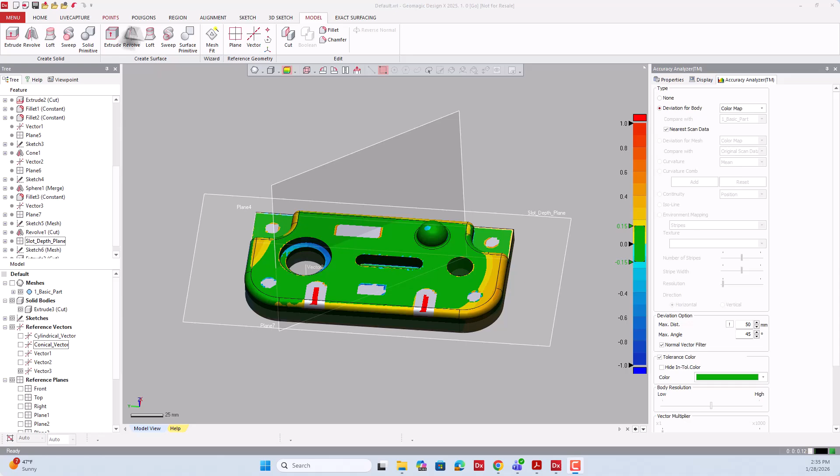So now continuing on in this lecture, we can see that we have made quite a lot of progress in this particular model.

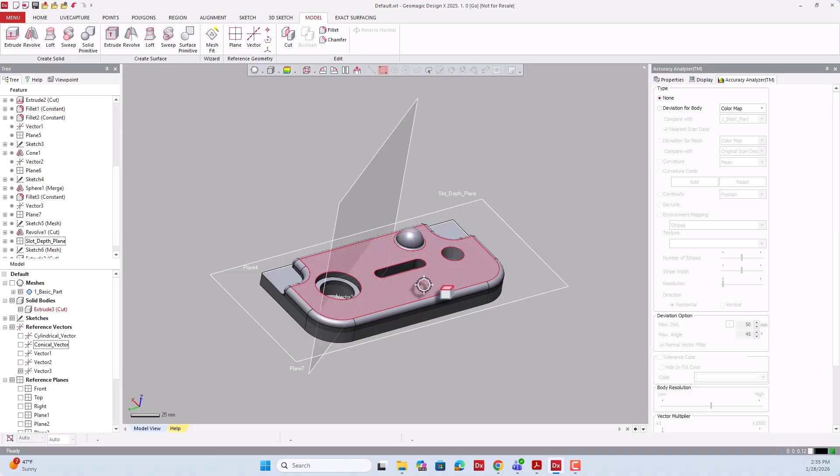As a shortcut, you can also hide the mesh here. If you want to make a mesh sketch on a particular face, hover your mouse over the face or plane and right click. You'll get the mesh sketch option directly, so you can click on that and it will point you to the mesh sketch button.

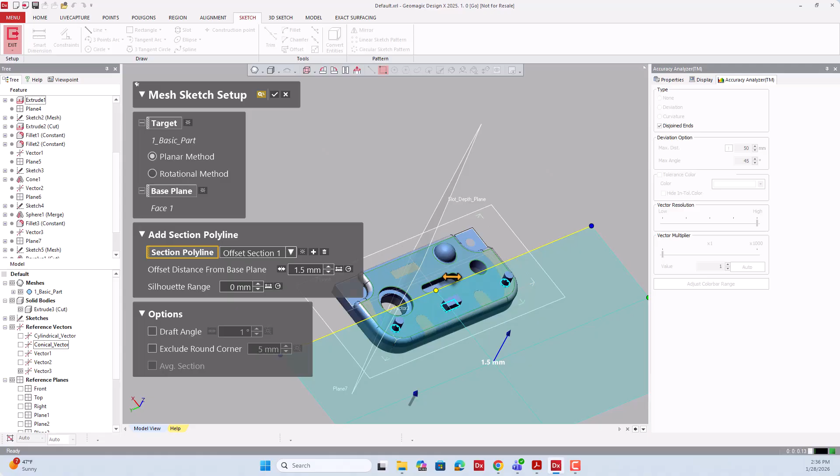Now you can also do the offset here. So I have done the offset. I don't need this side, so I can keep it, or I can drag it in here like that, and I can say okay.

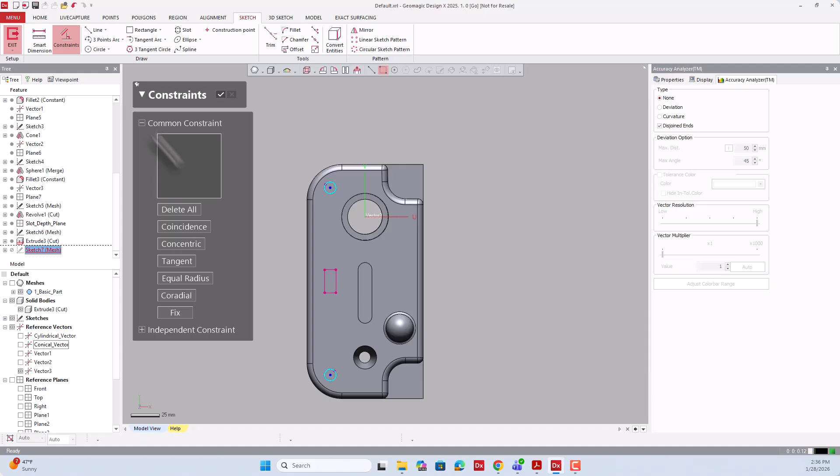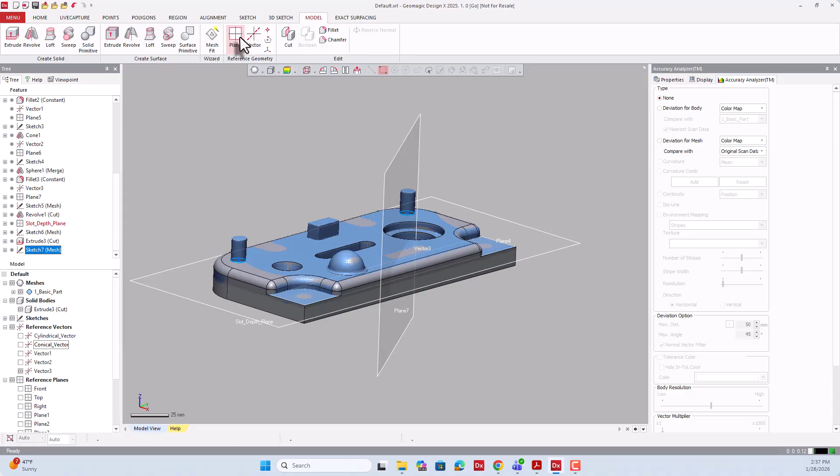So here I have these two circular cylindrical looking holes, so I can make my circles here, and I can add my constraints. I can select these circles and say make them equal radius, and add a dimension. The dimension from the scan came out as 9.87, so I can change it to 10 millimeters, hence adding my condition. And here, like we saw in the previous case, I can do an offset plane.

So I can choose the plane method, and go and say pick plane and normal axis. I can pick this plane, and pick this normal axis to offset the plane in a parallel fashion.

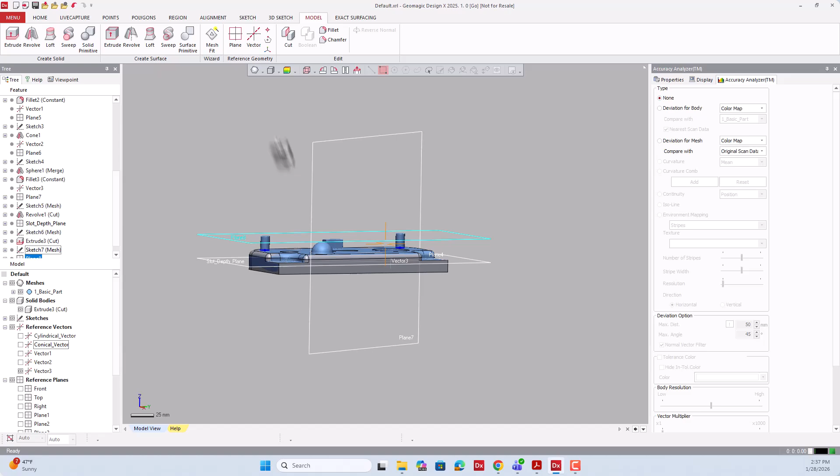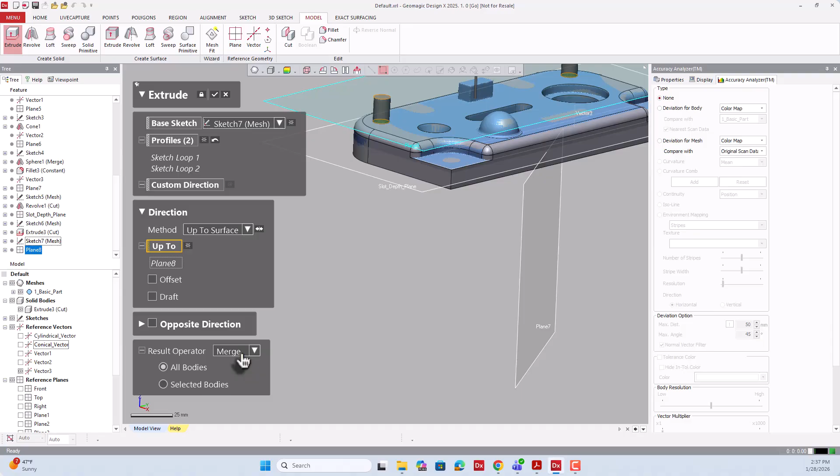Once it's done, we can go here to the extrude option in the model tab. So I'm in the model tab, and we go to extrude and select our base sketch. I'm going to select the sketch, and say extrude up to surface and select this particular body. And since we want it to be merged, we select merge as the option and say OK.

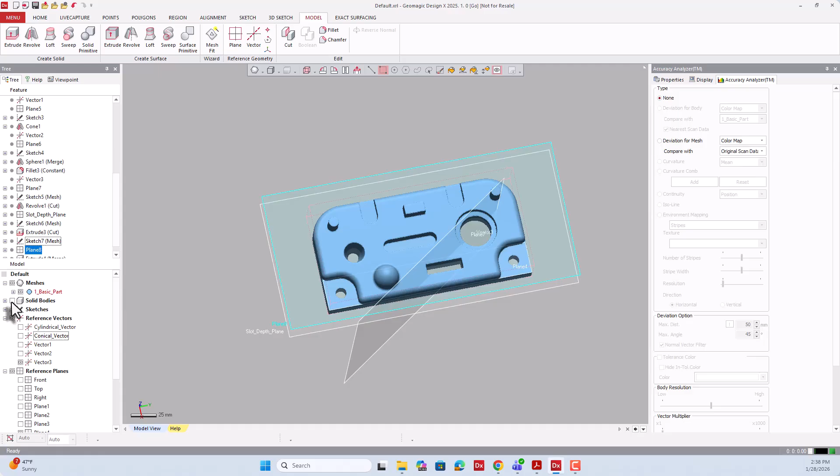So here we have built most of the parts of this particular body. We have a few other remaining parts. For example, for this area, I can hide my solid, and I can see that there are two through holes. So I can show my solid, select this face, right click on that face and do a mesh sketch there itself. I can bring it down and see both these holes. And here we can create our best fit circles.

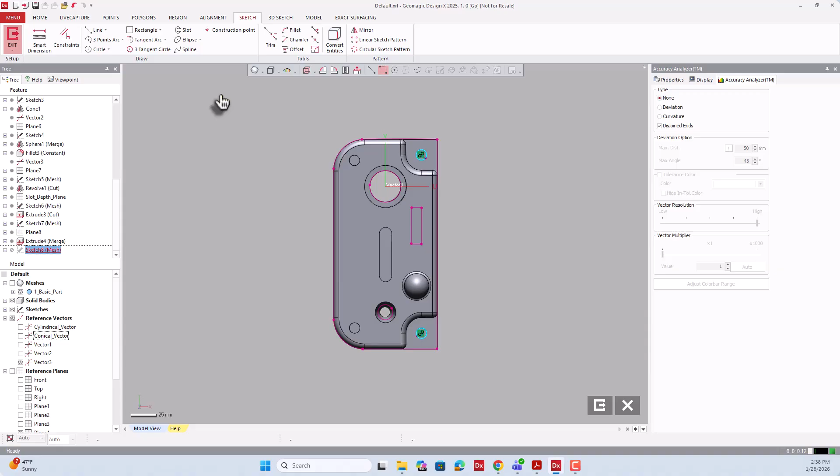Now I can make them equal radius, and I can also fit rectangles. So I can go to rectangle and make a drag box around this rectangle and say OK.

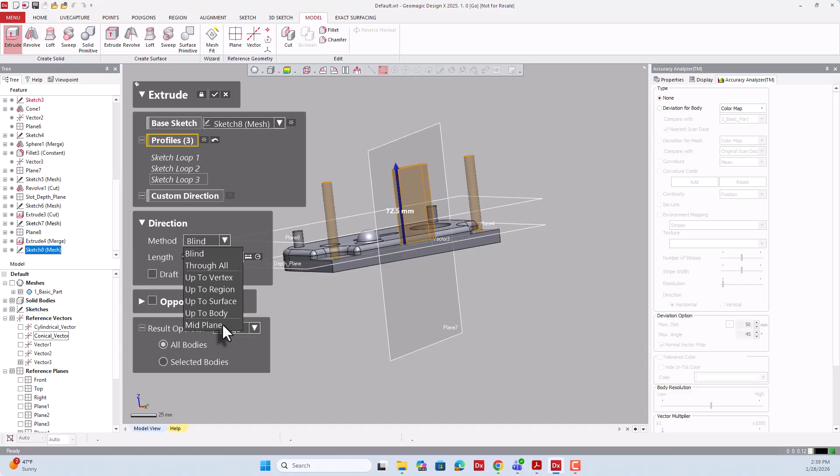Now, since it's all through holes, I can come out. I can go to the model tab, I'm out of the sketch. I can say extrude, and in the method we also have an option called midplane. So you can select midplane, and extend this through so that it extrudes uniformly on both sides, and you can add a cut tool.

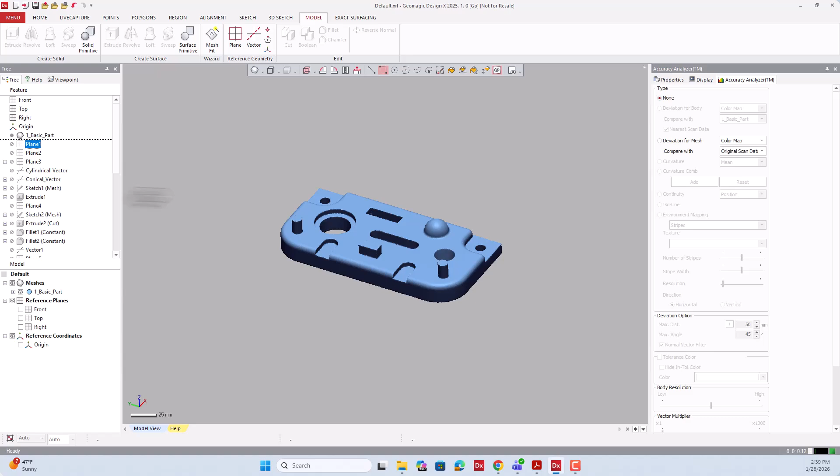So now here we have made this particular body, and we have reverse engineered the CAD file from the basic scan. At the top, you can also use rollback functions. We started with this particular scan, and at the end we have gotten this particular CAD file. I can also hide my sketches, reference vectors, planes, etc.

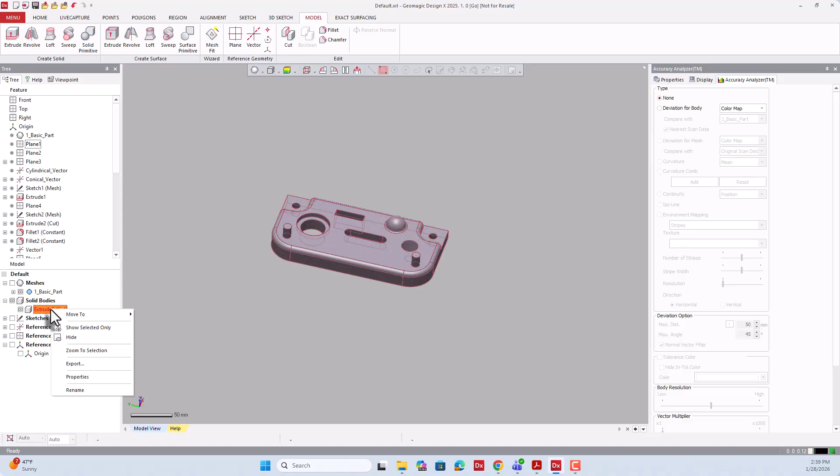Now, if I want to export this particular solid as a step file, I can come here to solid bodies, right click on my solid body and say export. Now I can export it to my desktop as a step or an IGS file. I can say export it as model_1, and I can export it or open it in any software.

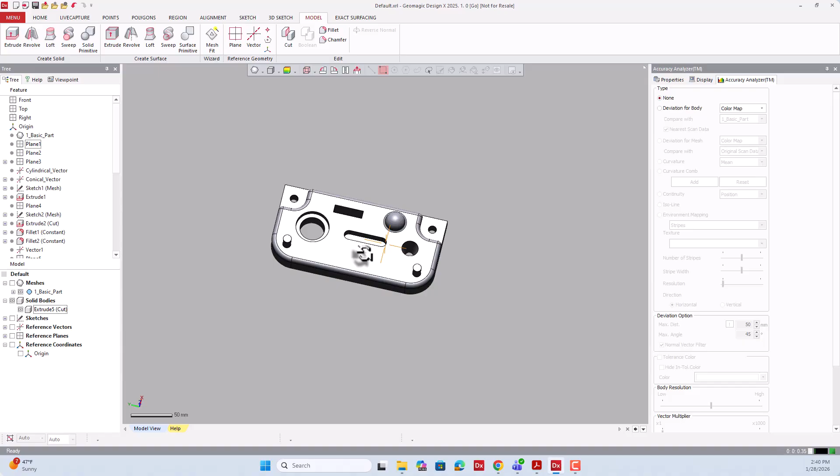Now, if you want to export this as a SolidWorks, Creo, or Inventor file, we can go in the Home tab, and there we have an option called live transfer. So I can click on the live transfer option here and go to SolidWorks.

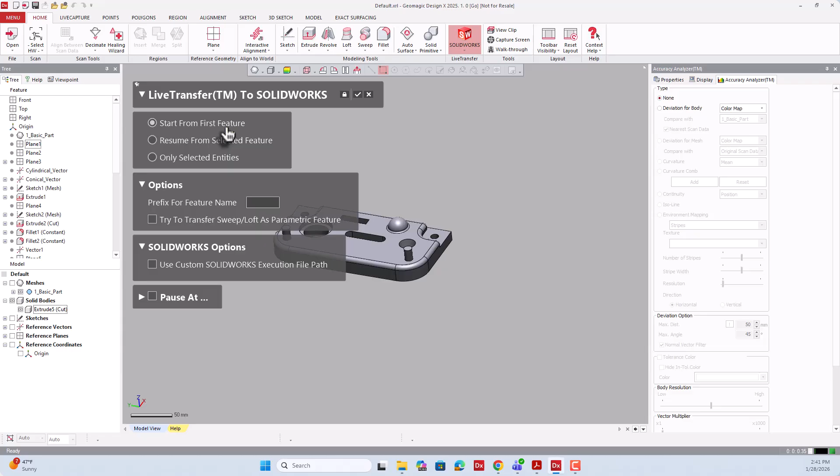I have SolidWorks installed in my PC, but we interface with SolidWorks, Creo, Inventor, NX, and AutoCAD. This is a very important procedure because instead of exporting a step file, we keep all this modeling history. So if I go to SolidWorks and say transfer to SolidWorks, I can either start from the first feature and export everything, or export some selected entities like sketches, extrudes, etc. So you can click here and start from first feature, and say OK.

Now this is actually going to load SolidWorks in your PC, and it will start rebuilding this particular model for you. So I am having it rebuilt in this particular system.

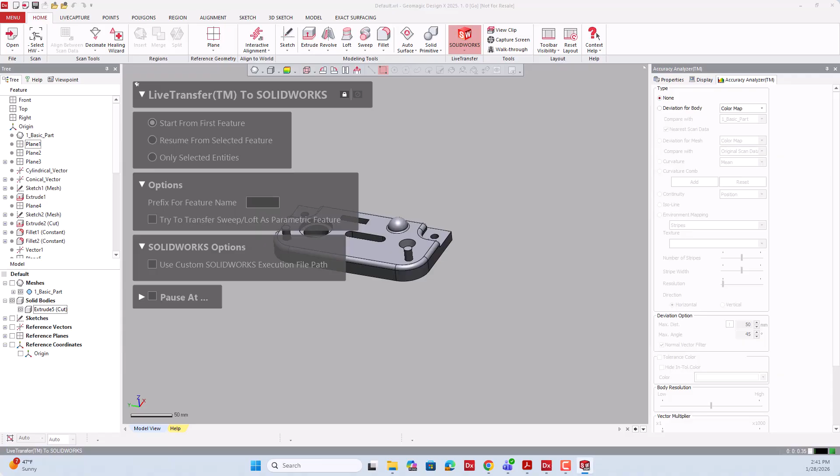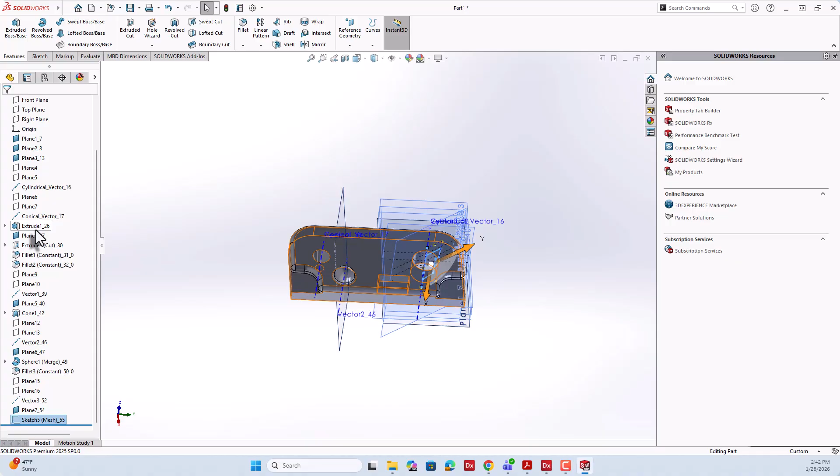And here you can see that the body is being transferred from Design X into SolidWorks, and we have all the modeling history, and extrude came as an extrude. So if I go in here and try to edit the sketch, we can see that all the dimensions are present, all the constraints, everything has transferred over from Design X into SolidWorks, and we get the complete modeling history.

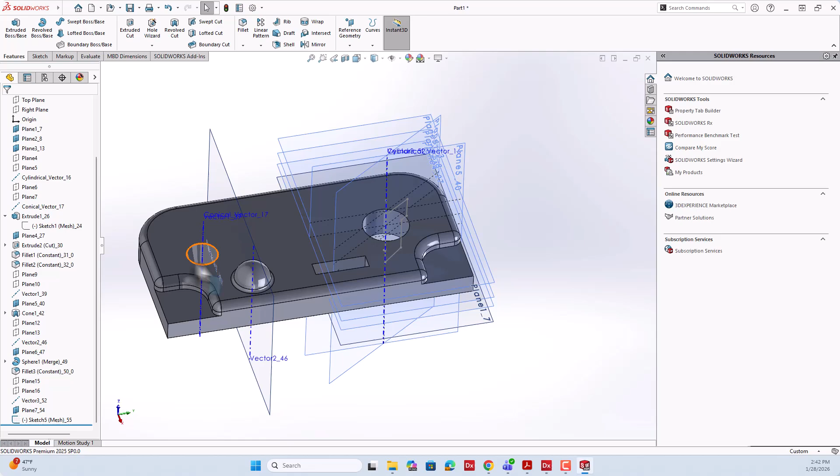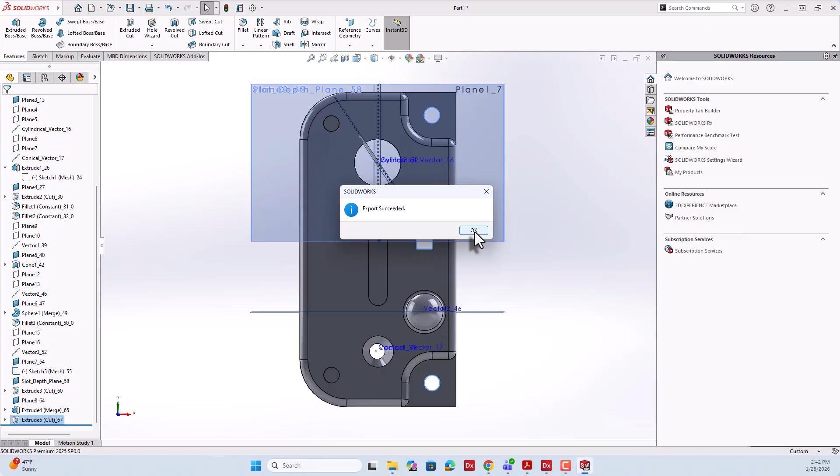And we have all the things transferred like fillets, etc. Everything has come over. In case there is something like a break, you can always roll to end. You can identify the particular feature of interest, and start at the next item and say resume from the area where we left off, and the software will redesign everything, and in the end it will say export succeeded. This file at this stage is an independent SolidWorks file that you can export and work on.

So you can save this as a SolidWorks part file, and you have the complete modeling history along with all the names of whatever items that we put in. Everything has come over here completely.

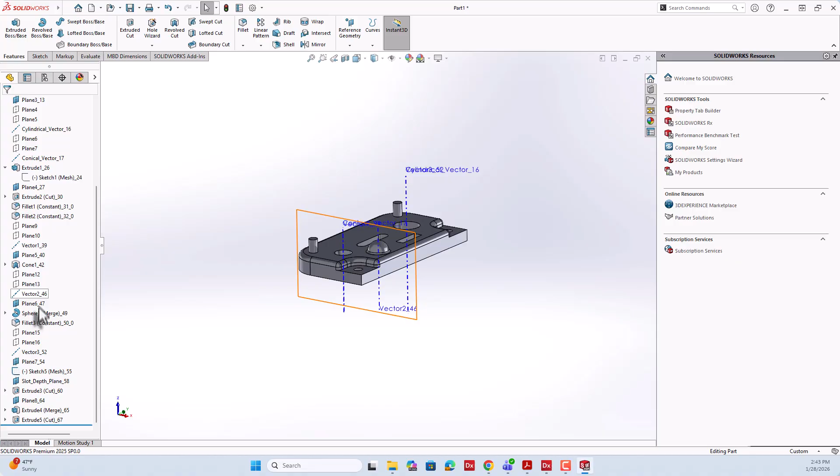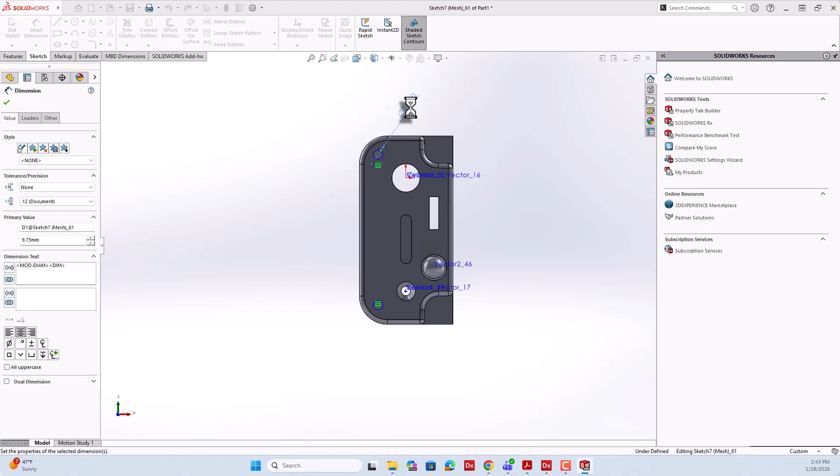This process is called live transfer, and it ensures that you get the complete modeling history, so that if you need to change any particular dimension, you can change it in SolidWorks itself. So I can come here, and if I want to change this from 10 into say 9.75, I can enforce that change, and the model would update in SolidWorks appropriately.

This is called the live transfer, and with this we come to the end of the first exercise, where we completely went from a scan in Design X to a finished CAD in SolidWorks. Thank you.